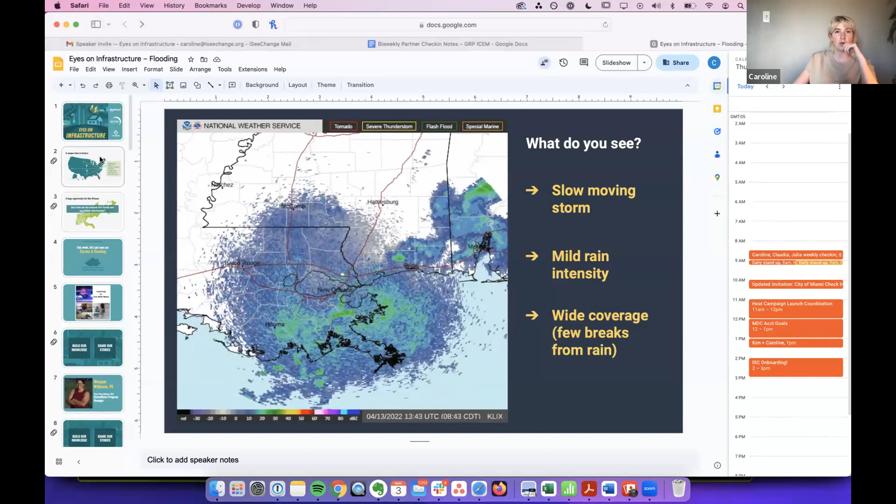So I was just gonna do the icebreaker, then the welcome, this is why we're here, storms and flooding this week, and then I'll throw it to you Sage for the grounding. This is the two ways we've been approaching the webinar: first we build our knowledge, then we learn how to share stories. And you can intro Megan if that works for you.

Yeah, that works. And you're gonna introduce at that point? Either way, sorry, I thought you wanted to, but I'd rather switch the voice up a little bit at that point for a transition. Cool.

Awesome, Megan, any other last minute questions? We got a few minutes actually, so not last minute. I don't think so, I'm good. I'm ready. Awesome, I'll try to keep my little fidget spinner out of the camera view.

That's okay, you go for it. Mine is always, you guys know those magnet screen doors? That's what I have in the room I'm in. If I don't do this it's just like a dark hole, so it has to be like that. My dog just runs in and out all the time, and somehow he's managed to get out recently even though there's virtually no way to get out. I think I blocked it off enough, but if I don't have it open, then... oh, Chucho. I was gonna say, now you gotta pay the dog tax, Caroline. Okay wait, I'm gonna get him.

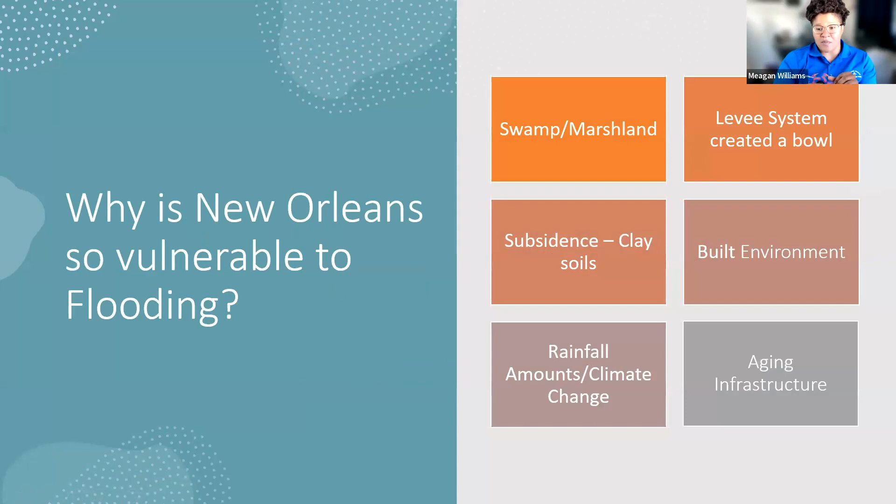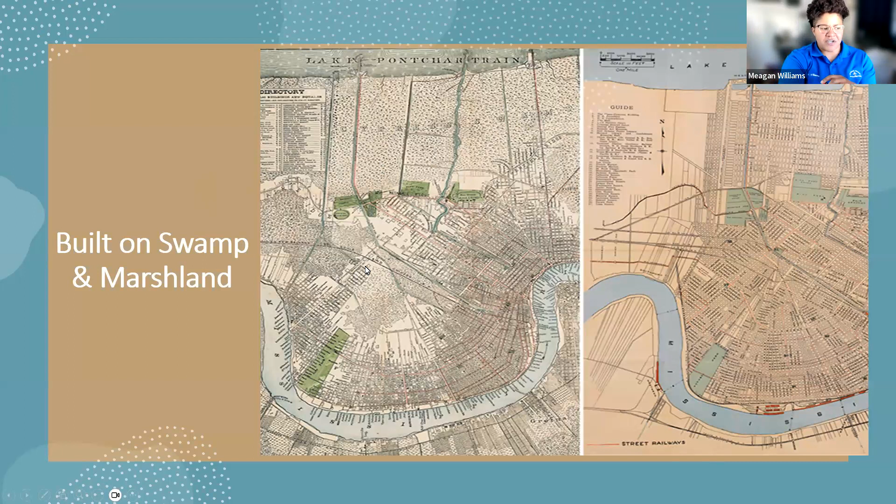For one, we were built on a swamp and marshland, which you can see here. If you look at these dotted areas, this is all the original marshland. Over here on the right, you can see we built streets and roads and homes on top of it, which was never a good thing. The long-term effects of that we are starting to see many years down the line. Down here in this central city-ish area, you can see the swampland even extending that far.

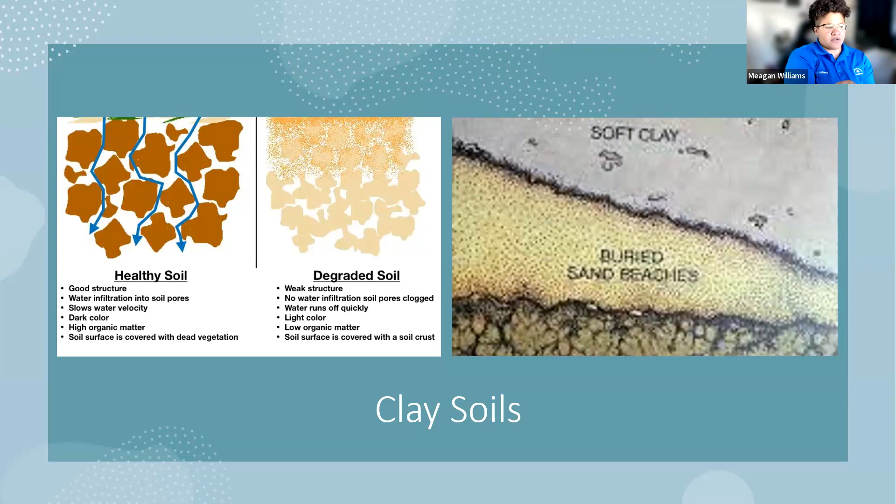So the clay soils, and this picture on the right is just a cross section, is that we sit on soft clay and buried sand beaches. Sometimes clay is on top of sand, and sand doesn't really have a good structural capability like some other soils. So now we look at the elevation profile.

The reason we had those structures is to protect us from river flooding. Way back in the 1800s, the levees were built to protect the established settlements where people were living from the Mississippi River flooding those homes. But what has happened because of that is we've trapped a city that's sinking inside of a bowl.

Additionally, speaking of sinking, subsidence is one of our biggest and greatest contributors to flooding. There is a natural settlement that occurs in the sinking of land; however, it happens at a fairly constant rate over time. The man-made side of subsidence is what's causing a big part of our problem.

We drain the wetlands. So all those wetlands that I just showed you, that we originally inhabited and built homes upon, played a really vital role in land development, for one, because of the deposits of sediment from the Mississippi River. But what they did was allow water to sit beneath us and kind of float the city almost. What we've done, because we've walled in where the city is, and now we have to pump water up and over the levee system, is we're pulling all of that water out of the soil at a very rapid rate.

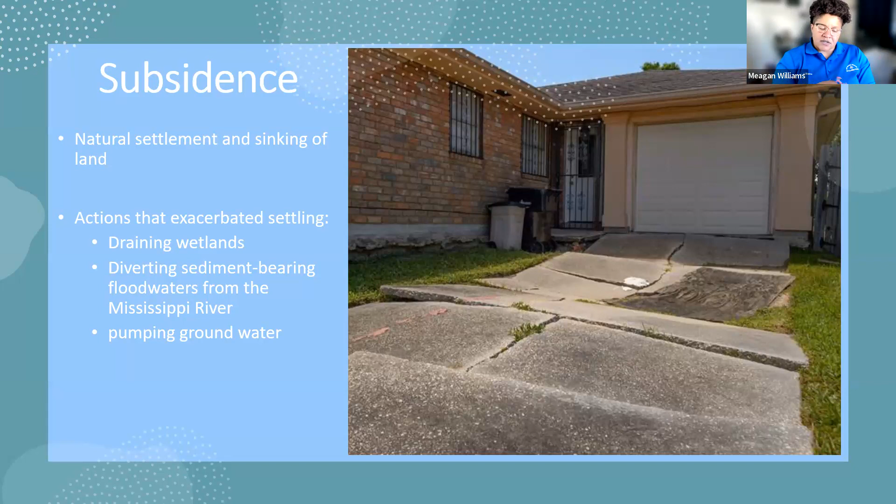One of the biggest factors that we as experts, as well as the community, are really starting to talk about is climate change. New Orleans is one of the wettest places in the United States. I don't think any of us are strangers to that. If you look back to the spring of 2021, I believe we had our fifth wettest spring in the history of recording these rainfalls. So what we're seeing is that on an annual basis, New Orleans gets about 62 inches of rain.

We're still getting that number, it's just how quickly we get to that number. We're having really heavy rains that inundate us in a short period of time. What that does is we're having fewer wet days because we're getting that accumulation of rainfall in a very short period, but we're having more dry days, which means the soil is continuing to dry out. So we have this problem where we need to balance the two.

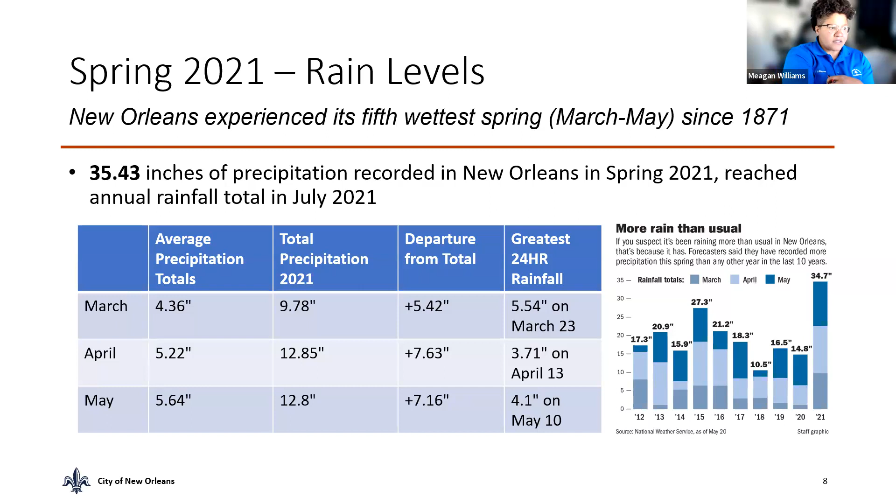As much as we are a city surrounded by water, we now have too much water. We have an excess of water right now. And everyone loves to pull out their kayaks and make light of the situation, which is kind of a blessing and a curse for us, because there's a lot of trauma around living with water the way that we have in the past.

So to give you an example of what we're doing right now is the New Orleans drainage system. We have over 1,800 miles of pipe, 160 miles of open canal, 100 miles of subsurface canal, 72,000 catch basins - the list goes on. And I say that to say this built environment that we keep talking about kind of exacerbates the problem as well.

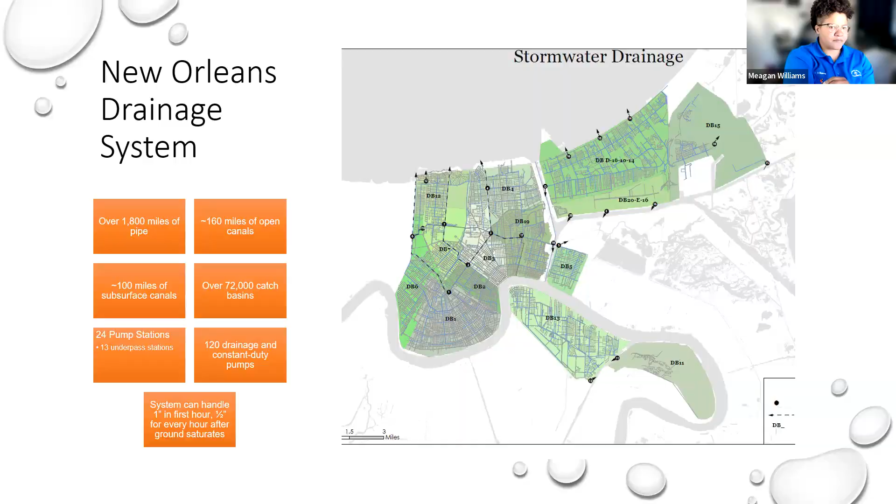So what else can we do? The way I typically think about what we can do is the multiple lines of defense strategy. Most people forget that New Orleans is actually a coastal city, even though we are surrounded by levees. Our coastal system is actually the first line of defense for all of pretty much Louisiana and some of our surrounding areas. The barrier islands, all of our marshlands, all of those ecosystems within those areas - those are really the first line of defense when a storm comes up off of the Gulf of Mexico.

Second is green infrastructure, and a lot of that is catching water where it falls before it even gets to our drainage system. I'm going to talk about that in a minute. Next is our drainage system, the pipes under the ground, our pump stations and catch basins. And then last but not least is our pump stations - I should have put levees on there as well, but our pump stations for the sake of time.

Green infrastructure is the mission that we are on right now as the city of New Orleans. Green infrastructure is sort of a man-made way of mimicking what nature does when left alone. If you go into a forest or a place with a lot of untouched, uninhabited green space, there's very little flooding.

In most places throughout the United States and even elsewhere, these overdeveloped areas are seeing a lot of flooding. Take New York City during Hurricane Ida, for example. It's very rare that a hurricane makes it across land from Louisiana all the way up to New York City. New York is another place that is highly impervious, with very little green space except for Central Park, which is in one location. Having very little perviousness to allow water to infiltrate into the soils means it takes the path of least resistance, and we saw a lot of flooding from Hurricane Ida.

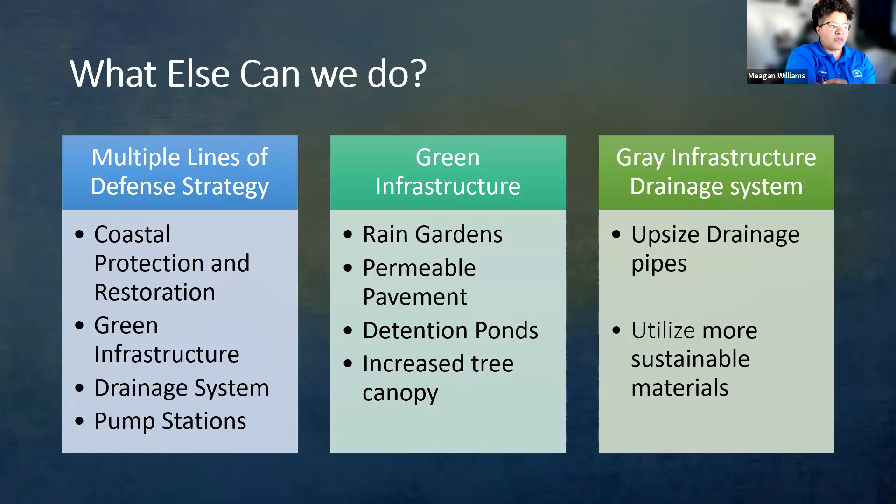A big part of what we've been doing over the last 10 years is adhering to the Greater New Orleans Urban Water Plan. This was released in September of 2013. There are many documents you can read, but they're like 200 pages, so the short and quick of it all is the mindset behind it really came from the Dutch and the folks in the Netherlands.

The idea is to retain water—to catch it where it falls—to detain it, holding it for a little bit of time before we put it into the drainage system, really allowing the hardest part of the storm to pass before that water goes back into the system, and then to drain it, but at a very slow rate so as not to continue overtaxing the pump stations.

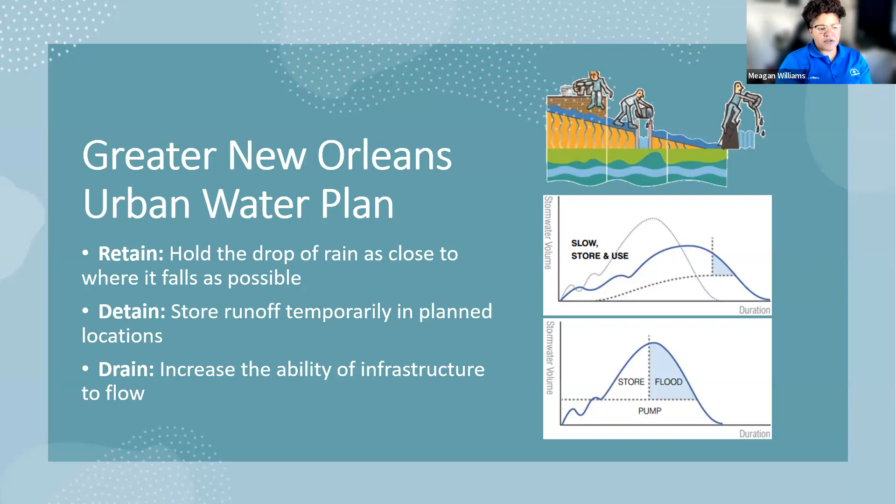Over the last 4 years, we've installed a couple of projects, one of them being the Hagan-Lafitte Drainage Project. This project is in Mid-City, at Easton Park, which is not far from the Lafitte Greenway—I believe it's like a block and a half away. There's a tank system installed underneath the park.

On a day like today where it's beautiful and gorgeous, there's probably kids out there playing right now on Easton Park. But if you look back to the previous weekend when we had all that rain, all of these tanks will fill up with water and hold that water, which has been spread out through the neighborhood for a lot of these storms.

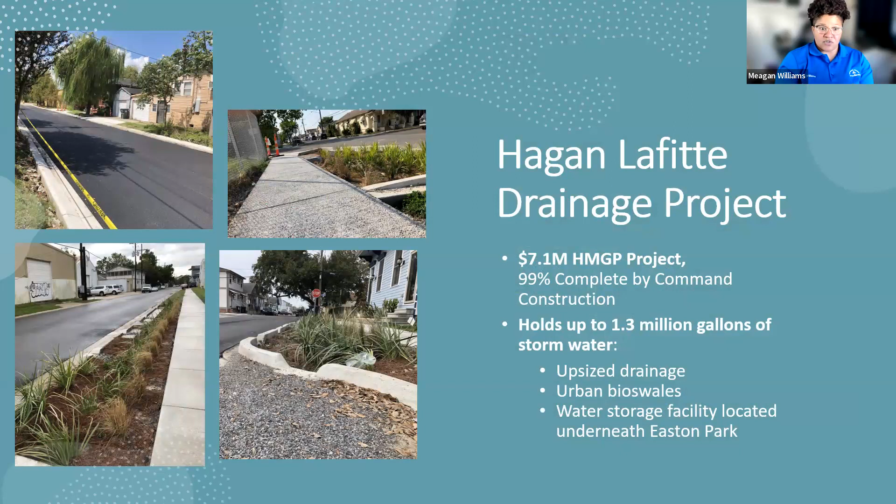And we do have evidence that it's a bowl within a bowl—this area of Mid-City sits below the adjacent neighborhoods. By installing rain gardens, we've upsized some of the drainage system. We've added permeable pavement in the form of sidewalks, and we added some bioswale. In total, that project can hold about 2 million gallons of water.

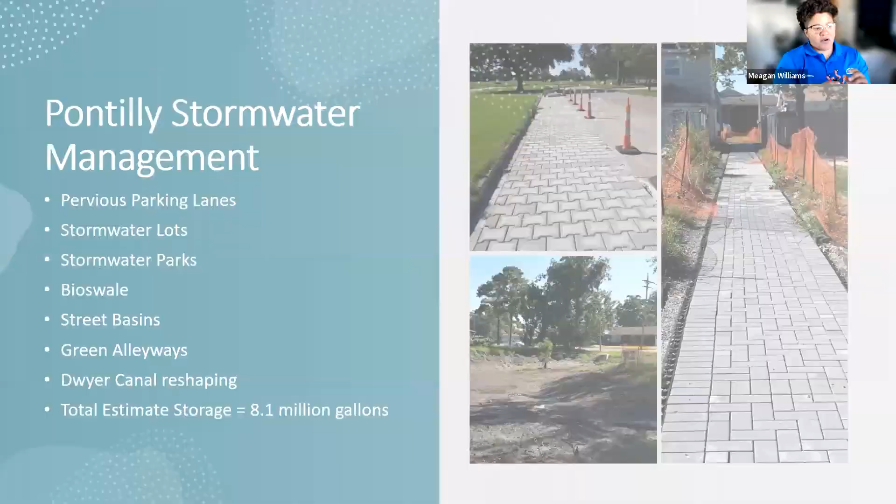Another example is the Pontilly Stormwater Network, which has about 7 implementation methods for green infrastructure: pervious parking lanes, and stormwater lots—lots that were owned by the New Orleans Redevelopment Authority and donated back to the city particularly for this project, which we turned into detention ponds. There's also a large bioswale/detention pond at Bartholomew Golf Course, which alone can hold just under 1 million gallons of water.

Going back a second—this shows some of the green alleyways that were implemented. These are permeable pavers, which allow water to seep through the cracks of the pavement while keeping these areas accessible to either cars or pedestrians, whichever it was designed for. The photo on the bottom is one of the stormwater lots that exists right now. With all of these implementations, this stretches from the Pontchartrain Park neighborhood all the way to Gentilly Woods.

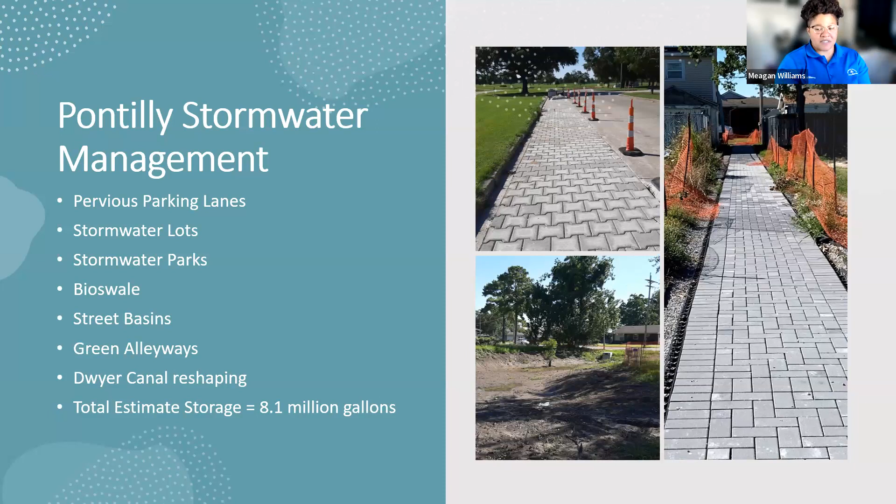There's about 8 million gallons of storage within this neighborhood, which for a little bit of context is like 250,000 bathtubs worth of water that we are holding that's not being put into the system right away. And we're continuing to move forward in our vision for

detain, retain, and drain with the urban water plan. We do have quite a few future projects coming, the Mirabeau Water Gardens, and all of these are within the Gentilly Resilience District area. Mirabeau Water Gardens will store about 10 million gallons of water. Blue-Green Corridors stretches on Allen Toussaint all the way down to Fillmore and through Elysian Fields, St.

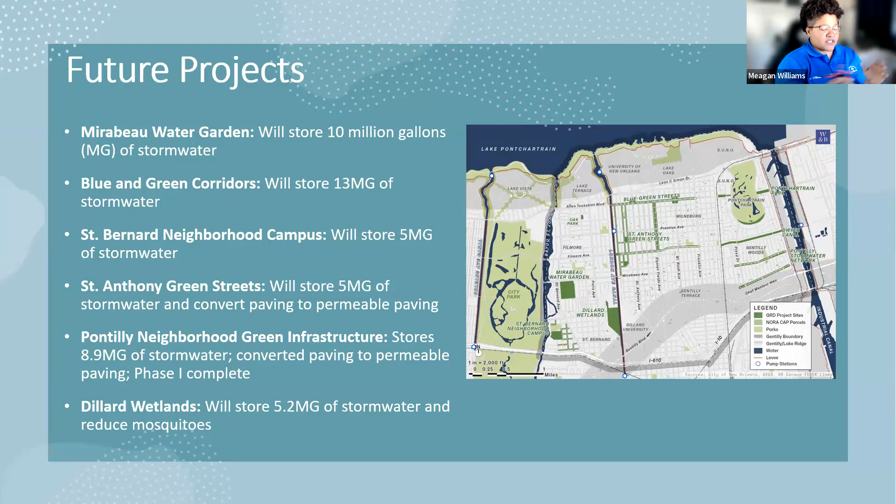Bernard Neighborhood Campus, St. Anthony Green Streets, which really shows the picture of the gray and the green infrastructure that we are trying to implement. The Pontilly neighborhood, we are adding some things to the Pontilly project, and the Dillard Wetlands, which will store about 5.2 million gallons of water. There's a lot more features to it, but this also helps with reducing mosquitoes.

Last but not least are our community partnerships. A big part of what we do that will make us successful is partnering with community groups. And I think this will lead into what Caroline and Sage will be talking about in a minute. The community is such a big part of what we do and how we do it and how effectively we can do it.

So by partnering with community organizations, which there are quite a few - Healthy Gulf, Waterwise, Healthy Community Services, the list goes on and on - what we are trying to do is assist these community organizations in developing plans and projects within their respective areas, because they are the ones who have a bit more of a voice than we as the city are. They can communicate a bit more effectively with the community than we sometimes can as the city.

And we are working to empower them to continue to do the work and allow them to lead the charge at a different scale. And one of the ways that we do that is to leverage some of the visions to apply for grant funding. There's a lot of grant funding available through EPA, through NOAA, through the National Science Foundation. There's a lot of money that's available.

And for us, a big part of how we get that funding is to be able to create meaningful relationships with our community partners, and then, like I said, to develop these projects and visions. Part of that is a unified GIS database of green infrastructure projects, which means collecting data a lot of the time, which I think Caroline may be talking about in just a moment.

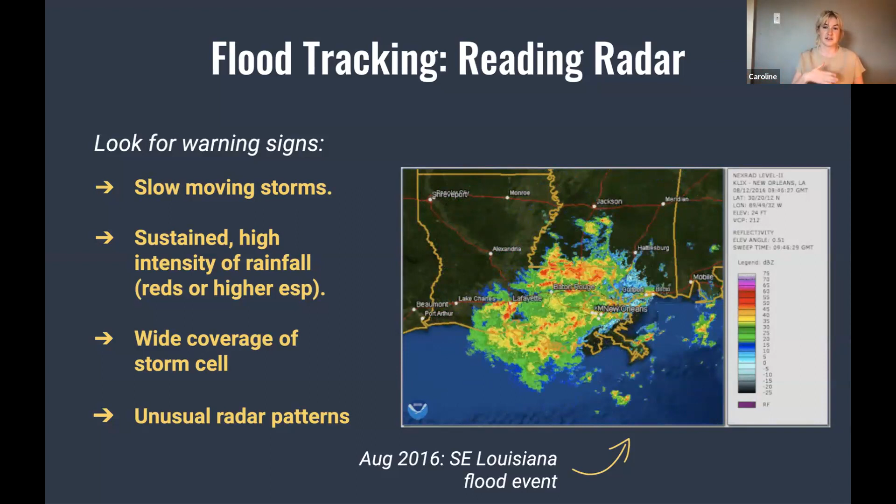One of the things to look out for is some warning signs: a slow moving storm, so if the radar is moving not too quickly over the city, sustained and high intensity of rainfall - those reds, yellows, oranges, and in the worst case purples that show up on the radar - and wide coverage of a storm cell. This is tapping into when our systems get overwhelmed with the consistency of rainfall or unusual radar patterns.

So this was actually just a few days ago. I think this was mid-April. Oh no, sorry, this one's not - this was last year. But if we're looking at this, there's a few key signature things that we're seeing here.

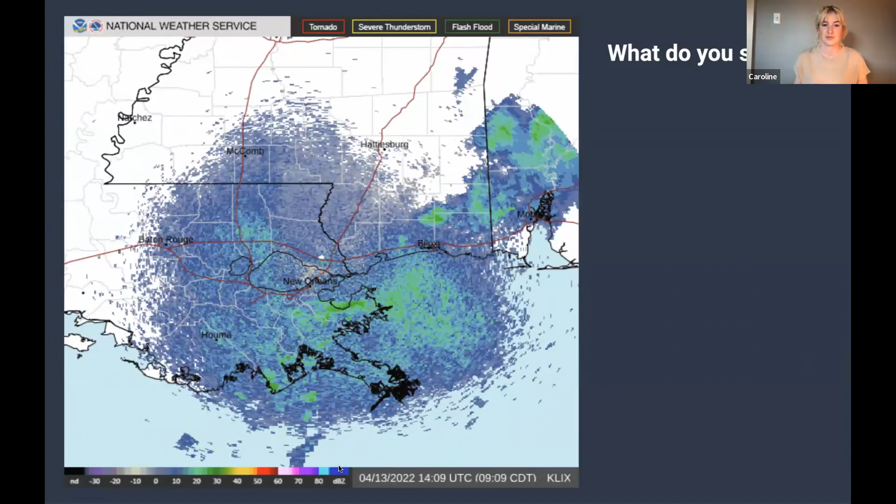It's fairly slow moving. Slow moving, definitely. Anyone else got one? Really big, covering a broad area. Yeah, slow moving, we've got some mild rain intensity, wide coverage. So a lot of - didn't mean to cut anyone off, they want to jump in. Intensity is staying green. Right, so that intensity too.

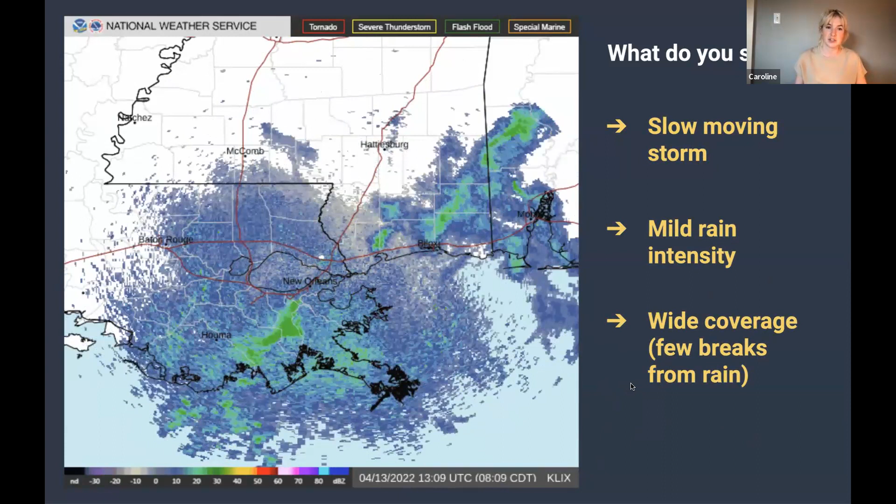So these things can just help you be aware of when we're going to be most at risk for flooding. Intensity over time is often what you look for, and this is a helpful tool in being aware. It's not going to tell you when it actually floods.

There are some tools that have been built. NOAA's Atlas 14 is a helpful one - you might already be familiar with this if you're a weather geek like us on this call often are. They're providing us with something called a recurrence interval, and this is how often, with the amount of rainfall you get in a certain amount of time, this storm might be anticipated each year.

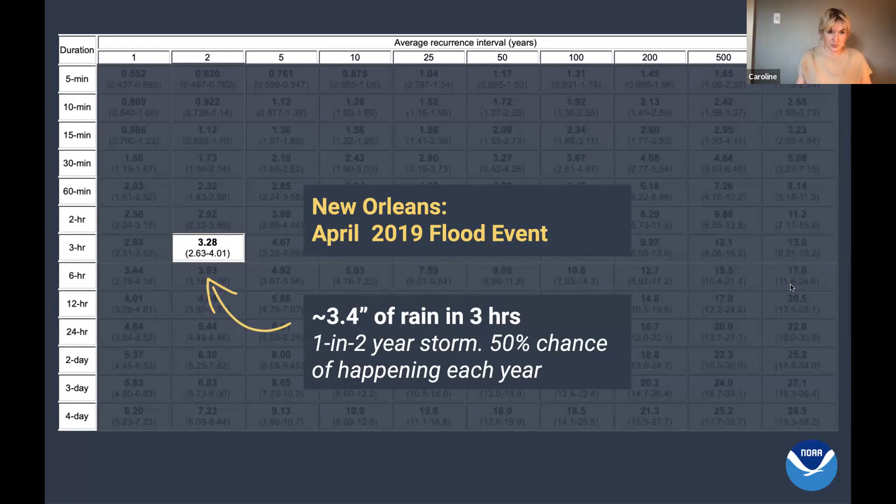Now let's look at a different storm - this is 2019, April, around an average of 3.4 inches of rain in 3 hours. This is a 1 in 2 year storm, a 50% chance of happening every year. What does this look like throughout the city? We've got certain people measuring pretty different things: a 1 to 2 year storm measured in this part of the city, a 1 year storm, a 2 to 5 year storm. The reason this is happening is because depending on localized rainfall and what you're actually measuring, you're going to experience dramatically different rainstorm intensities.

So let's look at - I think actually Megan referenced this earlier in the call, not positive - but this is a pretty significant rain event. This was July of 2019 again, but a different storm, and on average around 10 to 11 inches of rain fell in different parts of the city over 6 hours. This is a 1 in 100 year storm. ISeeChangers reported some people with 9 inches of flooding, some people recording 6 inches, 5 inches, and depending on where you are, that looks quite different. Each of these types of storms are going to be dramatically different in severity, and what our actual infrastructure can handle is quite different.

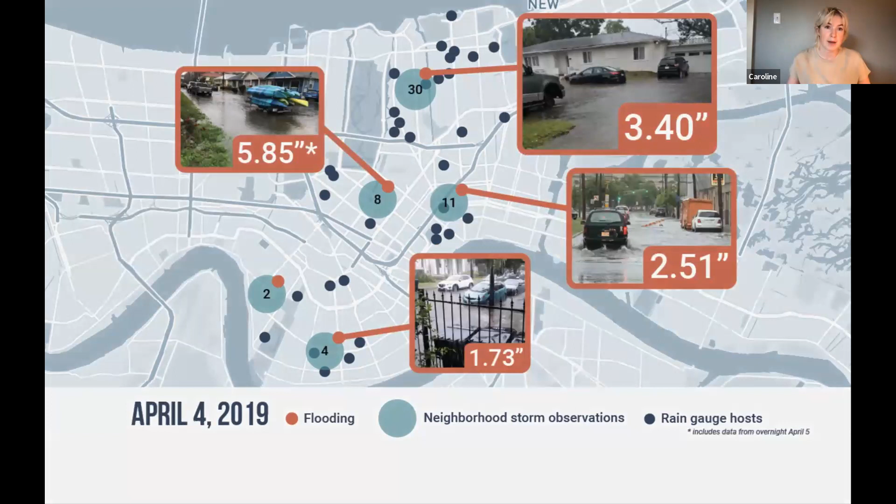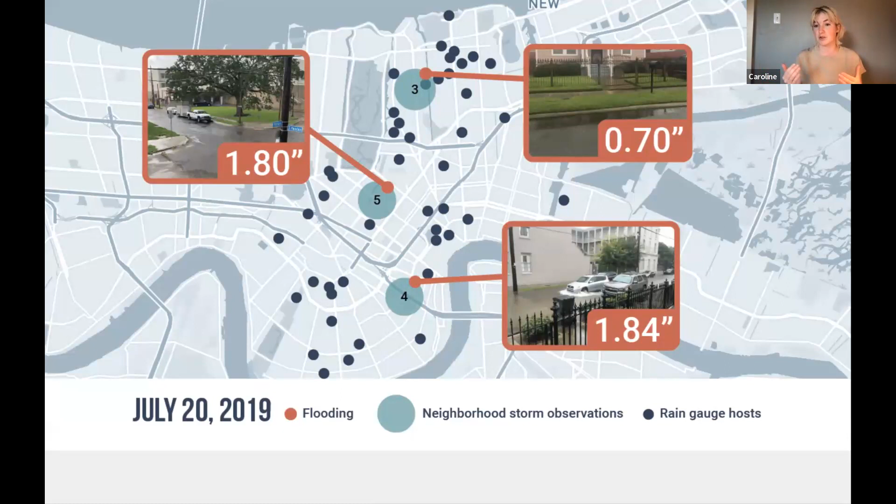So if we jump back to the 1 year measurements, these storms happen every year. This is where it's really helpful to use green infrastructure: plant your gardens, have rain gardens, rain barrels, things that homeowners and business owners can do here on a wide scale across the city can make a big difference.

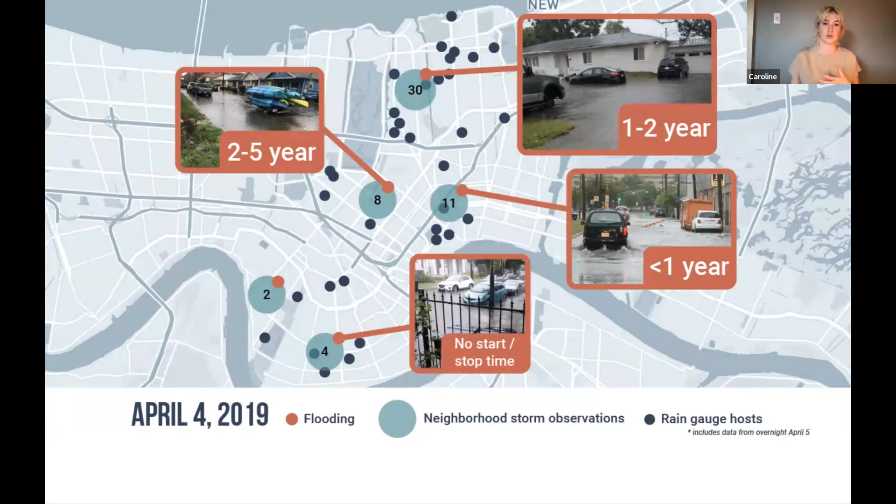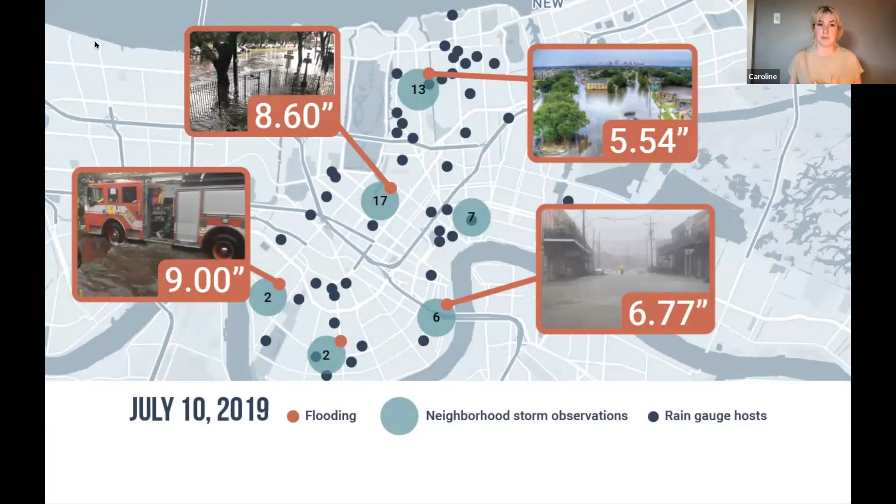When you have a 2 to 5 year storm interval, this is where our projects like the Gentilly Resilience District and other larger projects can really make a difference in mitigating the impacts of these storms. And when you have these larger events, that's where we're asking questions about how can we better live with water? How do you mitigate a 1 in 100 year storm? Because you can see the impacts are quite, they're more dramatic.

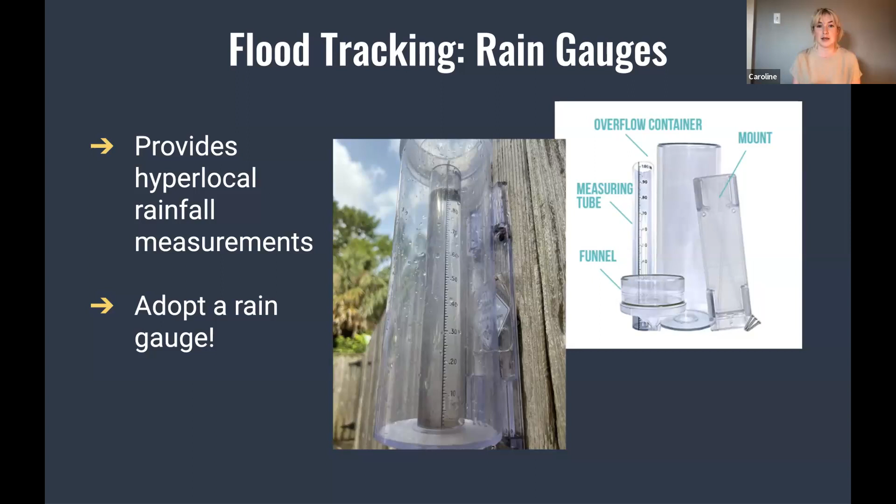This is also highlighting the importance of why rain gauges can really play a major role in helping us understand how hyper-local differences are throughout the city of how people are experiencing a storm. Rain gauges are actually just a plastic tool. They're not expensive. You can get one, or you can email me and we will send you one to track rain with us. But they're extremely powerful. The National Weather Service actually uses rain gauges all across the country to ground truth their rain data.

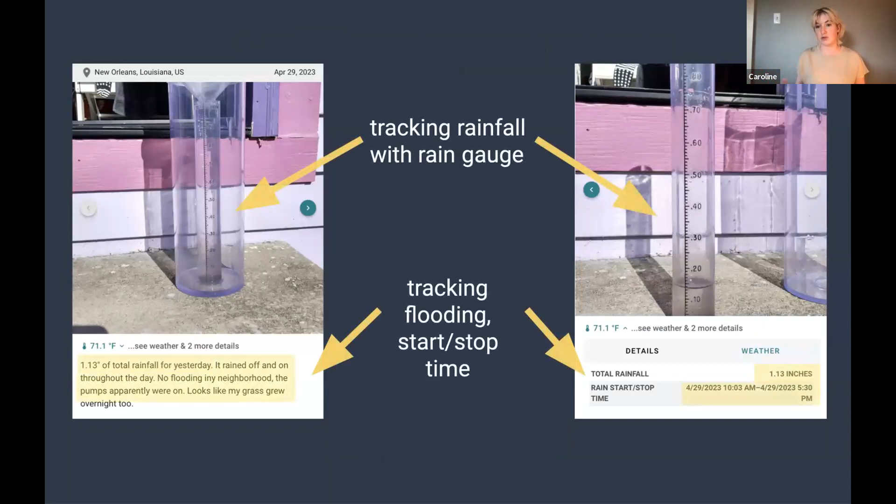And they provide really, really key insights on what people are experiencing block to block. So we have ISeeChangers who've been using them to record inches of rainfall, and also just keep us updated on when a storm starts and stops, so that we can understand what caliber of storm that is. There are a lot of other key things to look for when you're reporting flooding.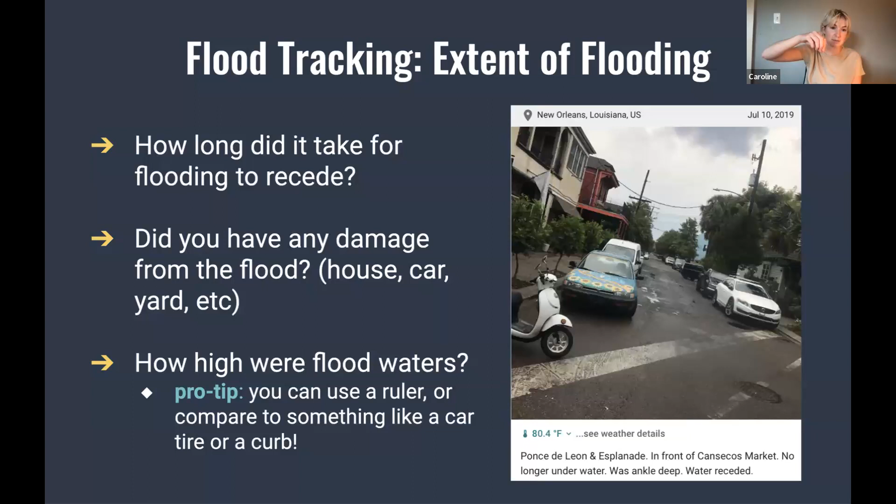So how long did it take for flooding to recede? What damage have you experienced from a flood? And how high were floodwaters, which you can use by measuring with a ruler to take a measurement, or you could compare it to something on your street, such as a tire or a curb.

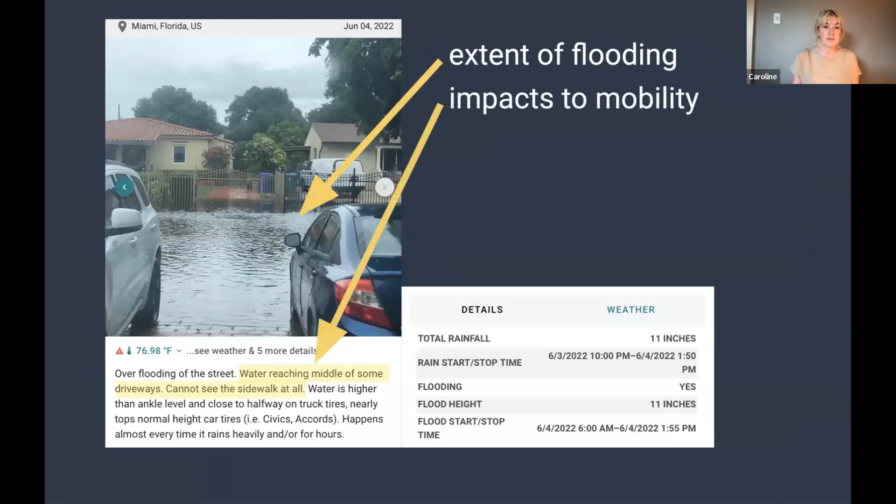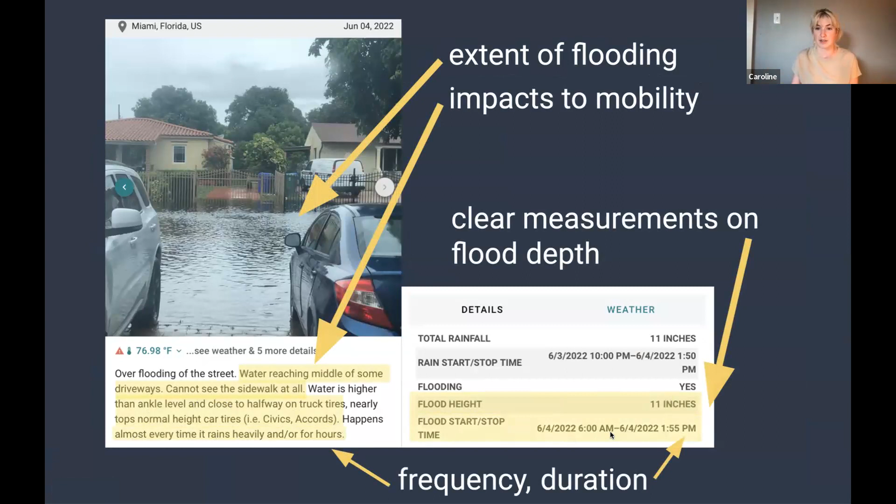So here we see someone is reporting the extent of flooding. You can see in the photo how it's impacted their ability to move around town, measurements of the exact flood height in inches, and also comparing it to, this was ankle level, close to halfway on their truck tires. And then they also reported how often it happened and the extent of the flood start and stop time. A great way to track this, if you especially don't want to go outside during a flood, is to track it from your front porch.

You can document the same spot over time. You can take measurements if you're able to, and this can really help us understand how certain areas are responding to certain storms and so forth.

You can also think about drainage issues. I know most of us here are aware and always keeping an eye on catch basins on your street. So first question is, are there enough catch basins on your street? May they be obstructed by construction debris, leaves, trash? Are they clear but not draining properly? These are all important things to think about.

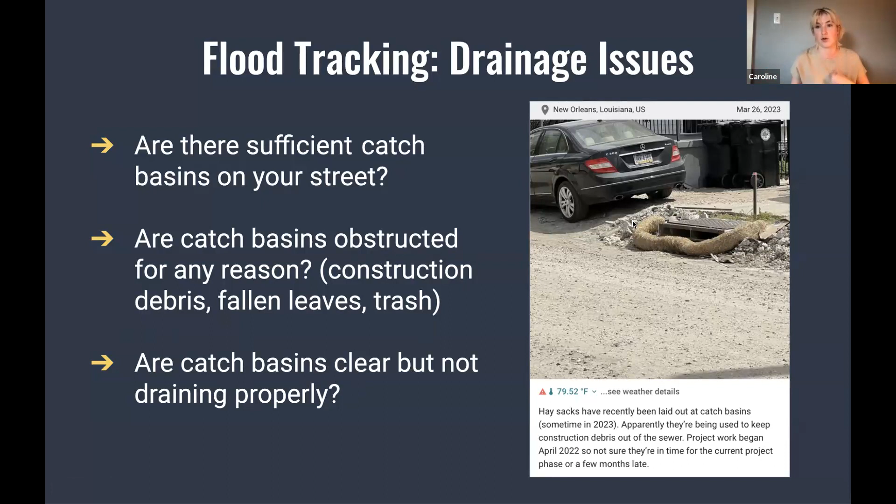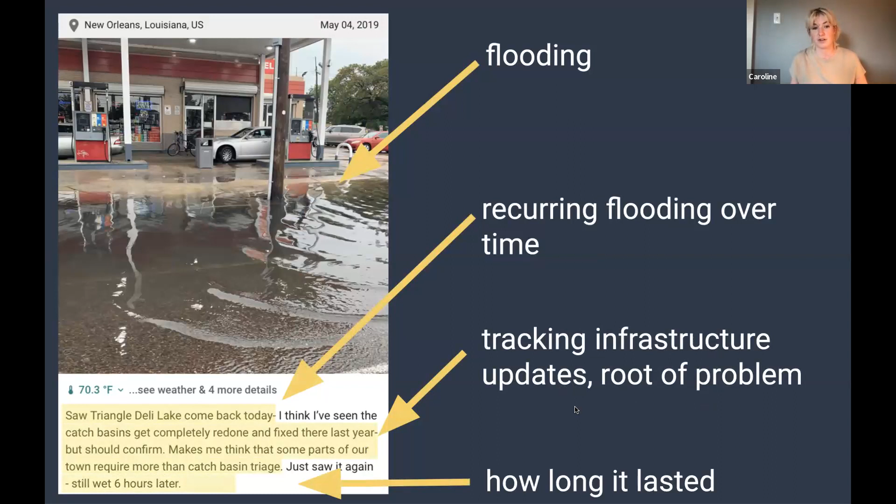This person actually was sharing a really cool mechanism of how they're hopefully trying to keep out construction debris from the catch basin. And here we're looking at another post where they're reporting the flooding over time, infrastructure updates, and they think that there's something deeper going on, and then also reporting how long the flooding lasted. So all critical details in tracking the extent of the flood.

With flood tracking, we are also looking at soil saturation and puddling. So radar is one predictive way that you can see if, in that day, maybe a storm might be headed your way. Another thing to be aware of when you're anticipating a flood is how much has it rained in the past few days? If it's been raining a lot and your soil is really saturated, or if it hasn't rained at all, the soil is going to be less capable to absorb water in the way that it normally would. And this can lead to a higher risk of flooding.

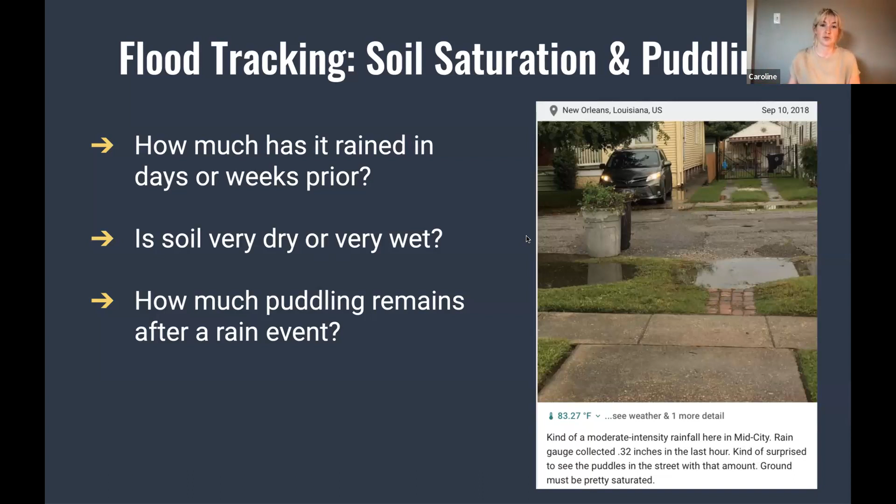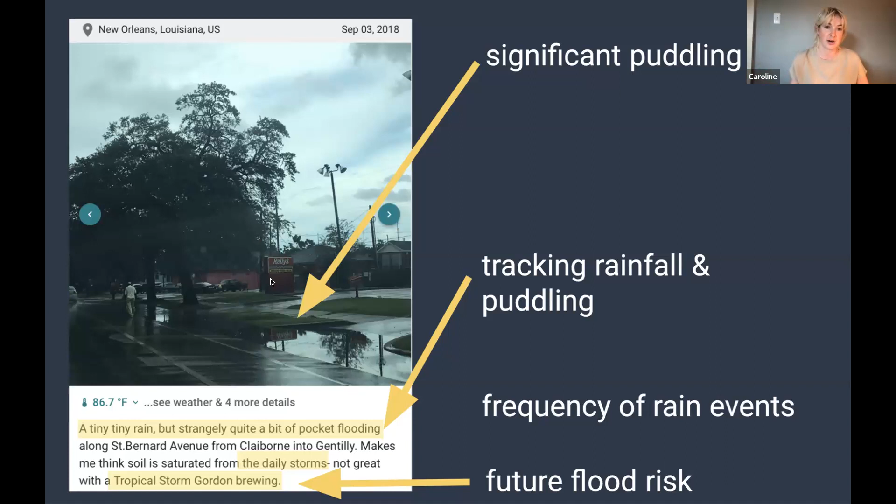So if soil's really dry or really wet, how much is puddling around your neighborhood is important to track. Here someone is also tracking the puddling, the rainfall, the frequency of the rain events, worried about future tropical storms. And here you can also see this is right next to a parking lot, and we're thinking about, with the stormwater fee, how this parking lot is contributing to runoff on our street with water in our blocks. So you can document a puddle, track that over time. We can also think about evaluating infrastructure.

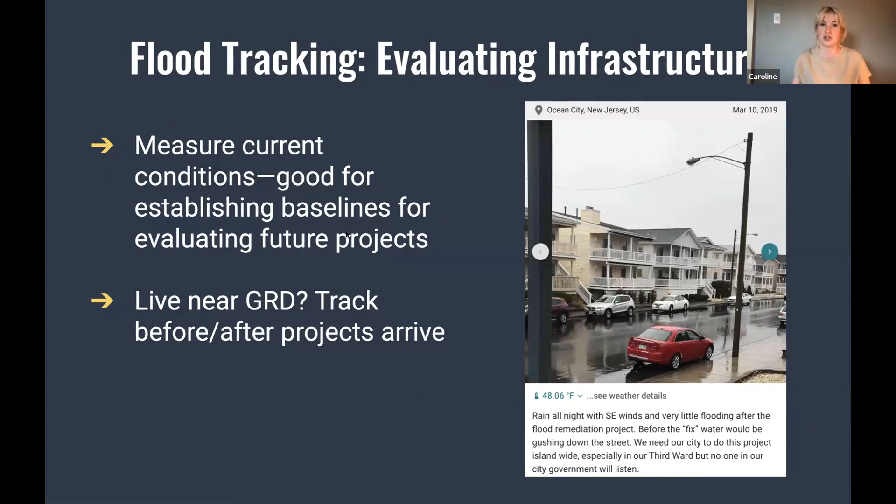We also want to hear about your solutions. What are your creative parking solutions? How are you protecting your cars and homes from flooding? Do you have hurricane preparedness ideas? Are you installing your own rain garden, or are you interested in NOAA's community adaptation program? Thinking about other places for public storage, maybe like a park.

Just to bring this full circle as to why your flooding data can go a long way: ISeeChange was used in the St. Bernard area ahead of one of the projects Meagan mentioned, the Gentilly Resilience District. We worked with a lot of community members there and quadrupled public participation, so we were able to hear from more people on what they were experiencing.

We documented almost 30 flood events that were outside of what modelers were expecting for that time frame. We were then able to work with the city and Stantec to redirect more money to the project and expand the project boundary by a few blocks. The project is now up to $4.8 million in the budget. We really want to work with community members to collect this data and show where this funding is needed.